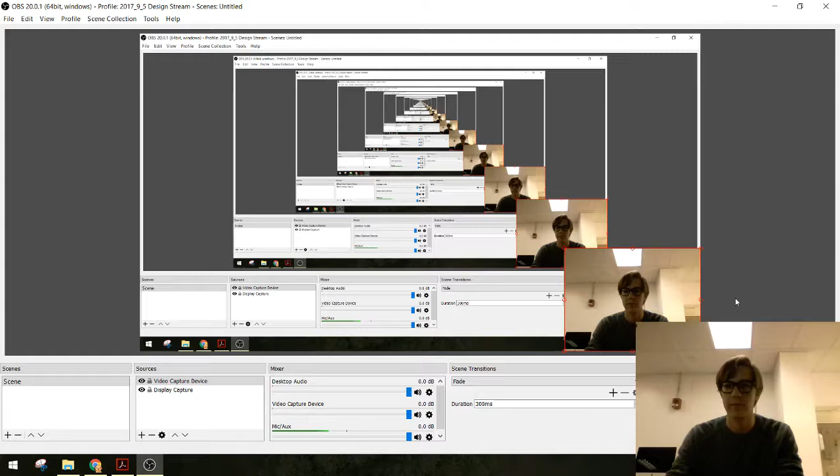I was like, oh, mind blown. So you're telling me... what is going on? Come on.

I was actually really intrigued by your information on Thingiverse. I was like, where did you learn that? You made up all of that. You made up some documentary.

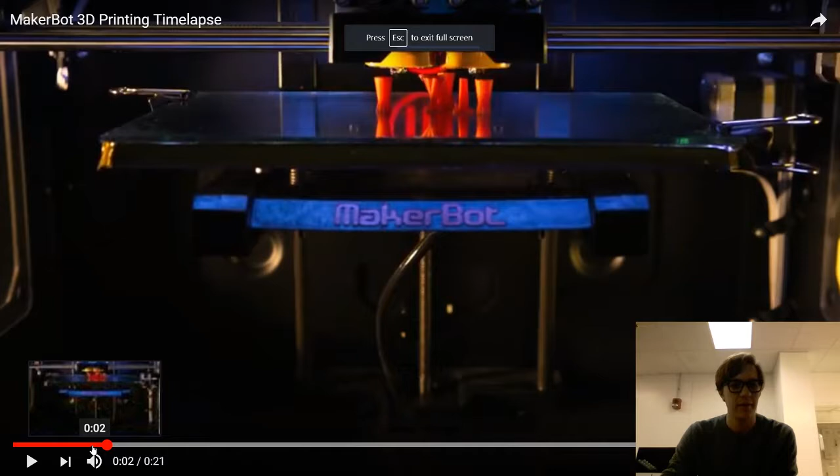All right, thank you everyone for presenting your sketch models. I think for the most part you guys hit the assignment on the head.

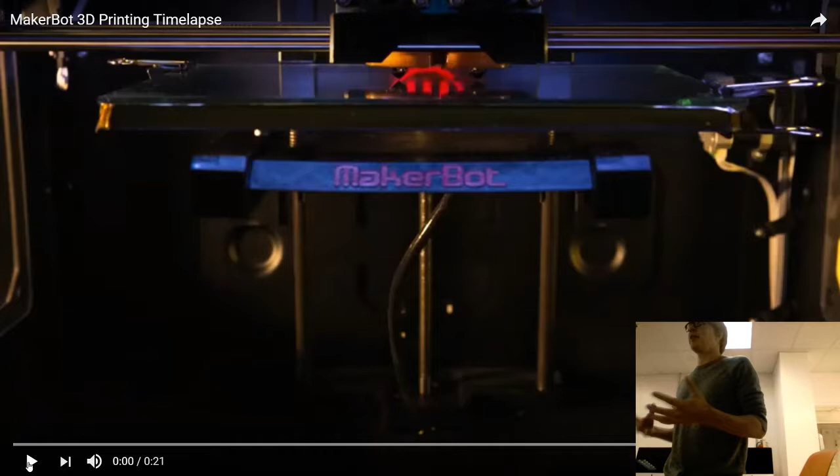These were not supposed to be beautiful, perfectly constructed things, just something to get your head back into the 3D space, thinking about real volumes in a way that's different than drawing on a 2D page.

So nice job. Hopefully you guys didn't have to spend more than half an hour or so on each of them, unless you were really into details and stuff, that's fine.

Like I said when we were talking individually, I'd encourage you to pick one of those ideas and take it the next step. In the next 45 minutes or less, hopefully, we're going to talk about some of the considerations you need to be aware of when you're refining your design in 3D for 3D printing.

I'd like to start off - I'm sure most of you have already seen a 3D printer work. There are lots of different types of 3D printers. The most common of them is an FDM printer, fused deposition modeling.

Basically, the way these work is it'll take a spool of plastic material. A lot of times it's something like a cornstarch-based plastic, like PLA, if you hear that term. It's very inexpensive, not super awful for the environment.

The print head will heat it up into a goop, kind of like hot glue, and it'll print layer by layer whatever 3D geometry you send to it. This is just one very sped-up example of a MakerBot, which is one of the printers you guys have upstairs, printing something.

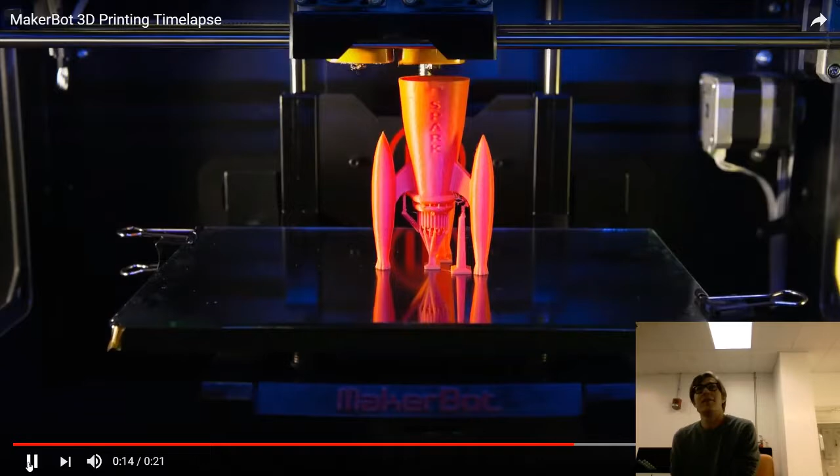Kind of a cool process. One thing you can notice is it prints from the bottom up, and orientation is going to matter.

The other thing I mentioned to you was one way you can get a preview of how an object, a 3D object that you create in Solidworks and export as an STL file, will look when it's 3D printed is by using a slicer.

So I posted on Carmen a link to download Cura, which is a 3D slicer piece of software. It will basically slice a 3D model into the pieces and code that a 3D printer needs to actually print that model.

There's a link to download it. This is the page that it brings you to. Cura is an open piece of software.

It's free. It works with a lot of different common 3D printers made by Lulzbot, Ultimaker, several other ones. This version of Cura I'm recommending you guys get comes off of the Lulzbot site - it's a specific build of Cura for Lulzbot printers, since it sounds like you also have a Lulzbot printer.

That's the printer I have, or Local Tech Heroes has. And the one that you're going to want to download is for Windows, probably, unless any of you guys are running Ubuntu or something else.

And then you got to hit this button too. There will be some options - just go through the options, download the Cura. It might ask you if you want to associate a bunch of different files with Cura. As long as you have the STL box checked, none of the other boxes need to be checked.

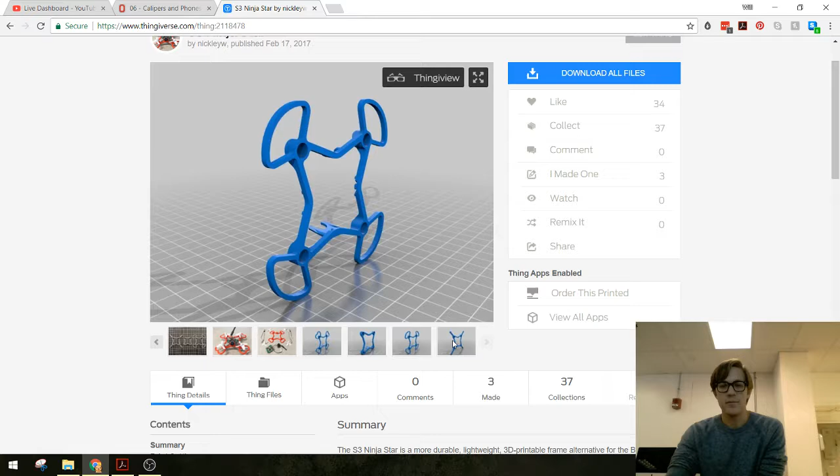It also lets other people who have made your thing show up here—178 people have downloaded this thing, and some have posted photos. Chris 4000 made one of these and posted a photo of his version of the object I designed, which is kind of cool. You guys have access to that stuff, so this is a really neat tool. Thingiverse also generates a preview of the 3D model of the file you upload, which is another cool feature on this platform.

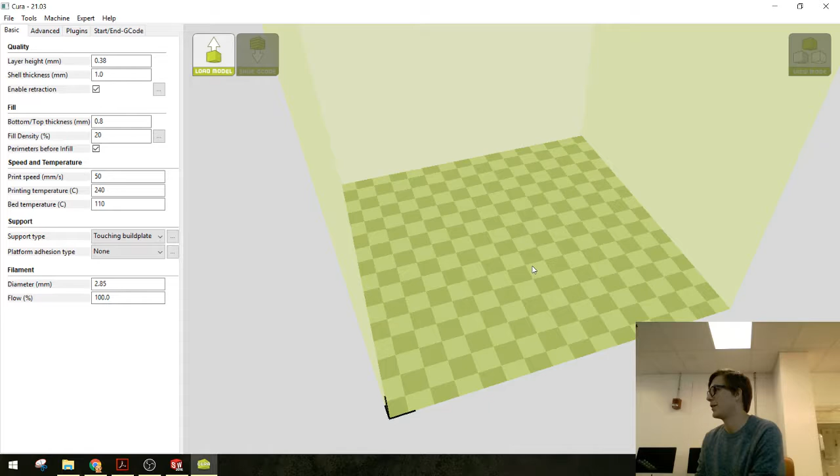This is what it looks like, the Lulzbot edition. It gives you a similar 3D space, but it has entirely different zoom, pan, and rotate controls than SolidWorks. They're also entirely different than Keyshot. Get used to that—I don't know why they can't settle on a uniform set of controls.

You can basically do a few different things here. Off to the side, these are all settings that have to do with the 3D printer and how it prints. You guys don't have to mess with any of that for what we're using this tool for right now. The big thing you want to do is load a model.

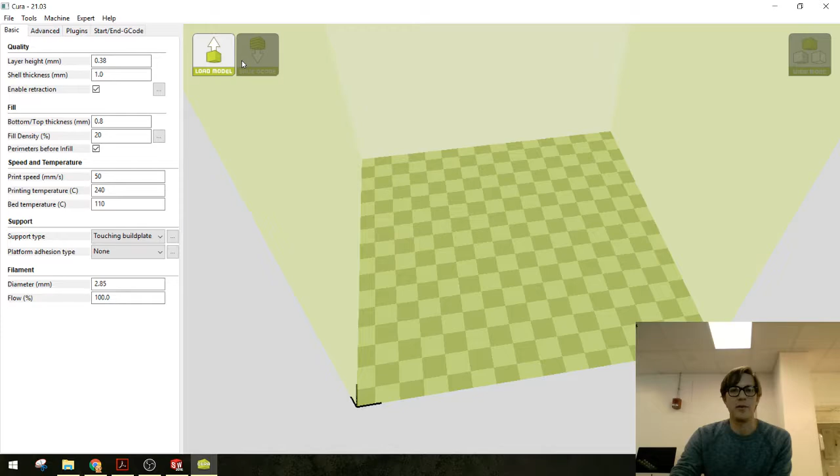I'll show you guys how to export as an STL, but once you've exported an STL version of your file, whatever it is, you can find it and open it. So I'm going to open up this guy right here, and it'll import the geometry to exactly the scale that it's supposed to be.

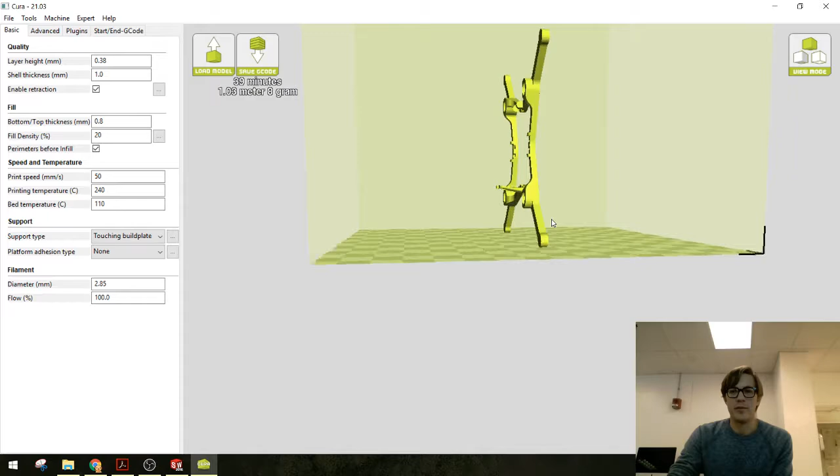So I've designed this object and added a bunch of dimensions so that it's this size. The build size of this checkered floor matches the size of the Lulzbot Mini, which I believe is about 8 inches by 8 inches. There are ways to change the machine that you're previewing on, but don't worry about that for now—just know it's something you can see when you're in a slicer software.

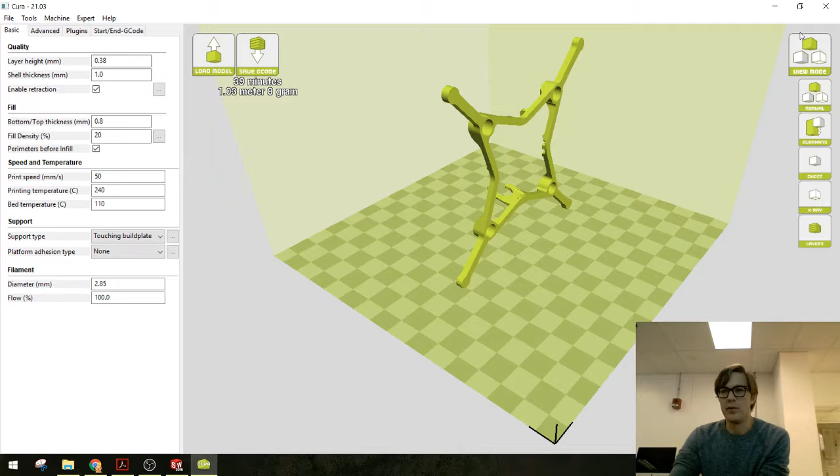What I'm interested in is different ways to look at this model. There are a couple different view modes off to the right side. One of them is layers, and if I click layers, it'll actually give me a preview of every single layer. Let's zoom in a little bit closer.

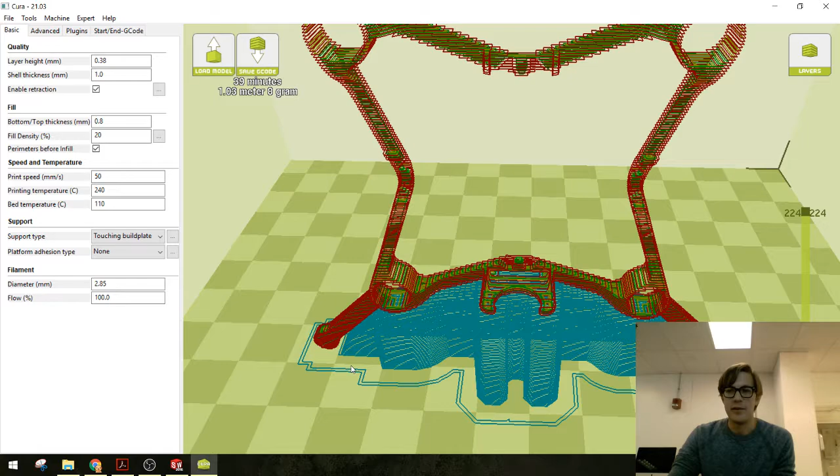Every single layer that the printer is going to have to make when it prints this part, which is kind of cool, and there are a couple different things you're seeing. Down at the bottom, I can also drag—let me zoom out a little bit here—and drag my layer progress down to see each layer by layer by layer.

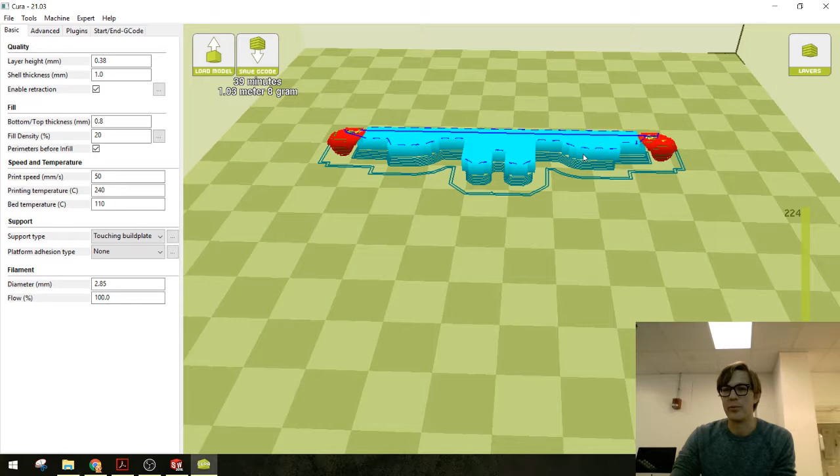So the first few layers, it's going to print a lot of this blue stuff, and by the time it gets to the top, it's not really printing blue stuff anymore. That blue stuff, these blue layers, is support material. It's the same material used to make everything else in this geometry, but it's not actually part of the model. When I brought this in, there wasn't this crazy amount of material underneath here.

It needs that in order to have a place to start printing the rest of this geometry on my quadcopter frame when the printer makes it up to that layer. In general, you guys are going to want to minimize the amount of support material required to print your models, because it sticks to your model and you have to scrape it off. It's just hard to clean up, and it adds extra time and material to your build.

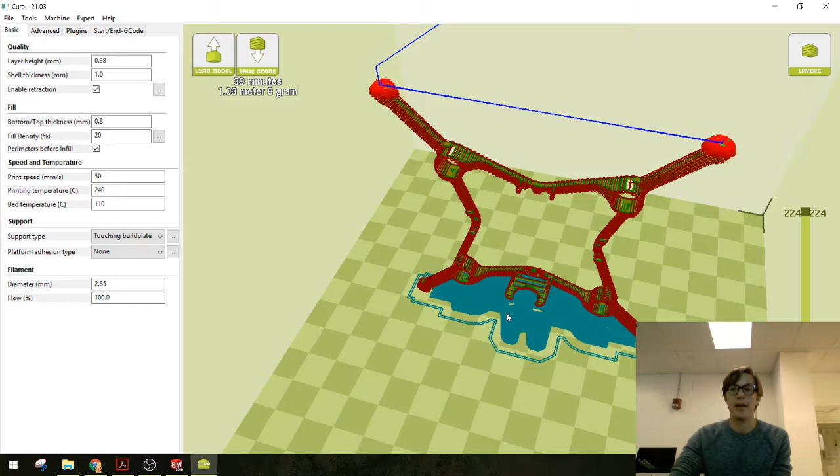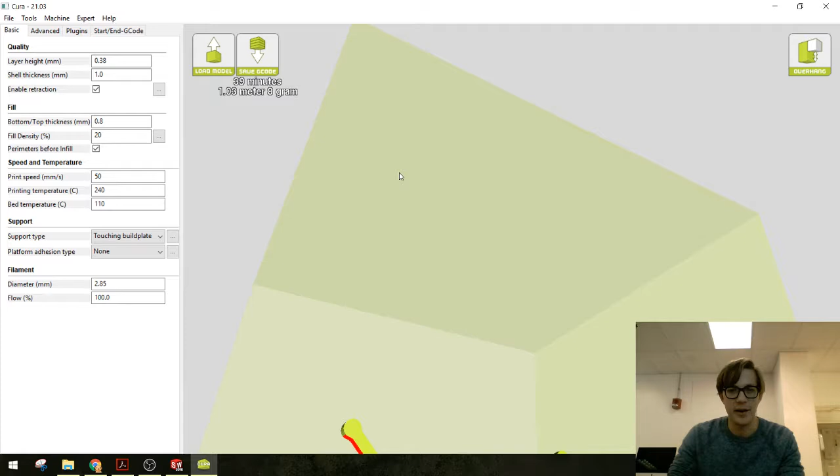It probably does need it in the middle, and that's the other kind of crazy thing here. Let's see if we show overhang. Okay, so there's another view mode here called overhang, and you can kind of see by this icon. Man, I hate zooming and stuff in here. Let's see if I can.

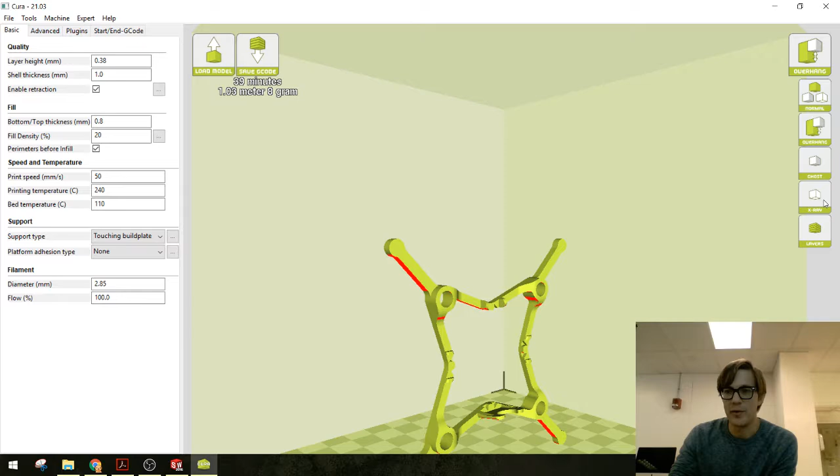All right, basically any area that is facing down is kind of an area that might need support material. As Liam just pointed out, when we looked at the layers, it added support material for the bottom of my frame here, but not for this part. It would definitely need it there, and there's a good chance that if I went to print it in this direction, it would just fail—you'd get a big nest of gross 3D printed material.

I wanted to show you this way because one of the things you can think about when designing your object, especially when you bring it into Cura, is you can change the orientation of your object to make sure it prints the way you want it to.

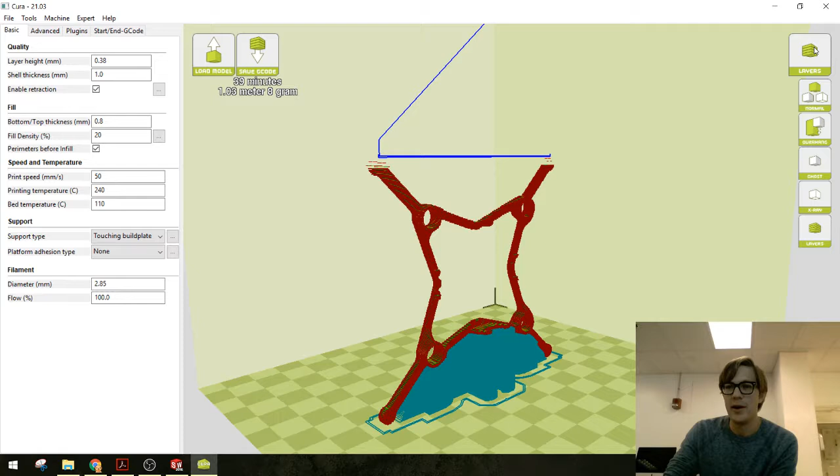To change the orientation of your model, go back to a normal view and click your model. You can drag it around, move it to a different spot on your build plate. I'm going to rotate this back around.

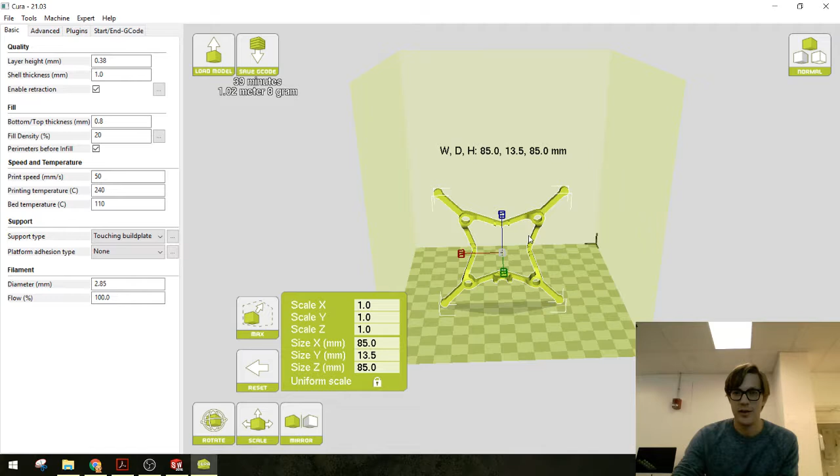You can scale it too. If you didn't care about the dimensions of your object, like if it was a vase or a cup, you just wanted to print it as big or small as you could, you can change the size of the model, drag to any size. But since these have very specific dimensions, I don't really want to do that.

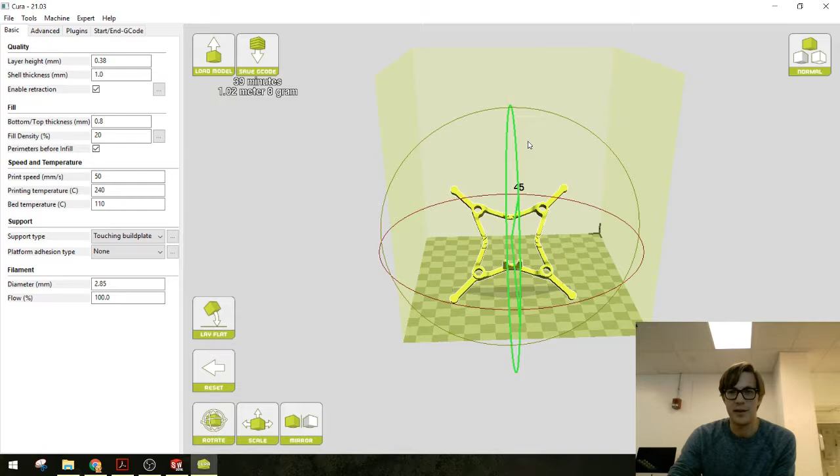You can rotate your model. This button lets you rotate, and if you click on one of these different axes, it lets you rotate along that axis. It does tend to snap, you see it go 45, 60, 75, 90, it kind of snaps to regular angles. So if I wanted to rotate this 90 degrees so it sits flat, there we go.

Now if I check my layers mode, it processes it again, and I don't see any of that blue material underneath. There is a blue outline around the edge of the model, but that's just something this version of Cura for Lulzbot does by default to show you the proximity of the build before it prints.

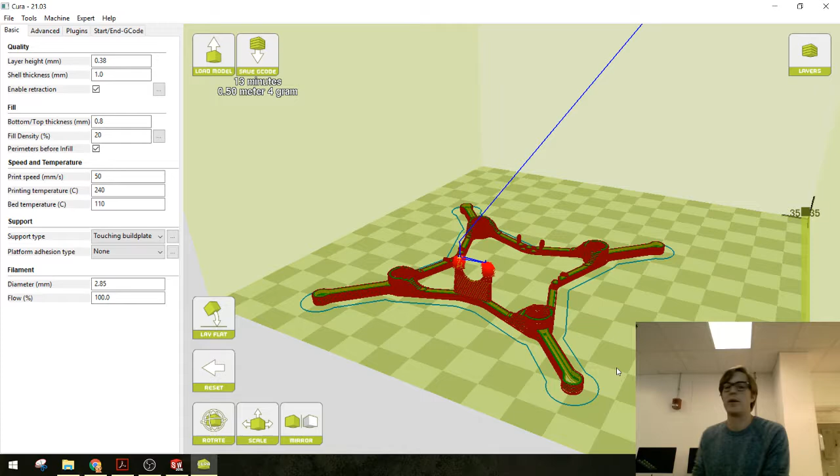But this is kind of what I want you guys to look for: find an orientation to print your object that really minimizes the amount of support material you need, or you might have to redesign something, or even slice your model in half and print it in two sections to get it to print properly.

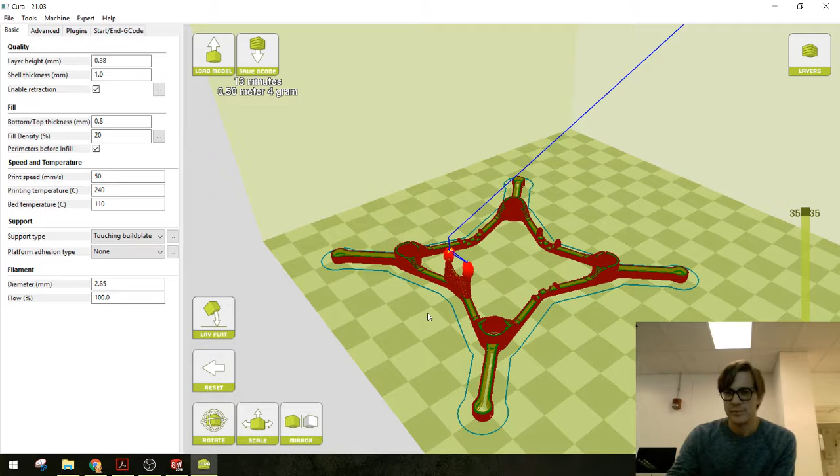You'll also see red areas in Cura. That's like edge material, it's all printed solid. If you looked at it, it would look like a relatively solid part.

Then there are these green and yellow areas. The inside of a solid part, when you 3D print it, usually isn't solid. The 3D printer is smart and will fill it with a honeycomb pattern. So let's say I printed a solid shape that looks like my water bottle, it would print the outside completely solid, and then fill the inside with a honeycomb structure, so it's not wasting material.

It's not going to print three pounds of material for just this shape, if that makes sense. All those settings, like how thick the edge material is, how thick each layer is, that's all stuff you can tweak, but that's for maybe another class. If you want to get into 3D printing, there are a lot of really cool settings you can change. I want you guys to import your models into Cura and take a look at how they might actually print.

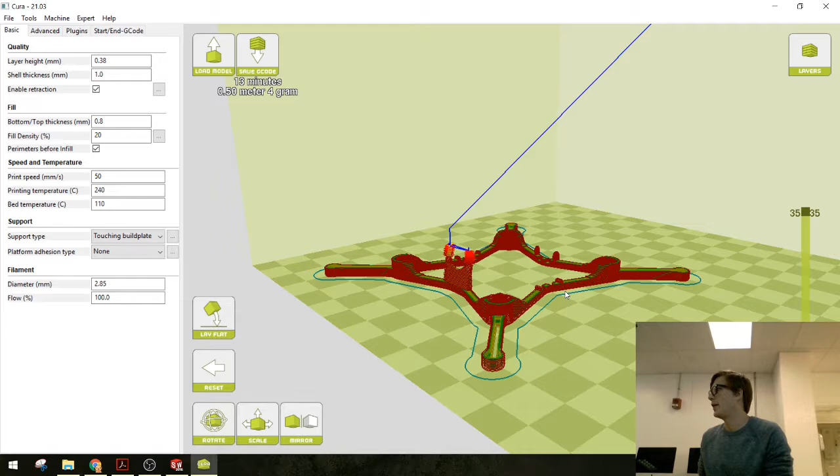In order to get your model into Cura, you need to export it as an STL. So I'm going to go through that process once really quick. Let me just open a file that I already have... I don't even know what that is. Oh, my sketch model, okay cool.

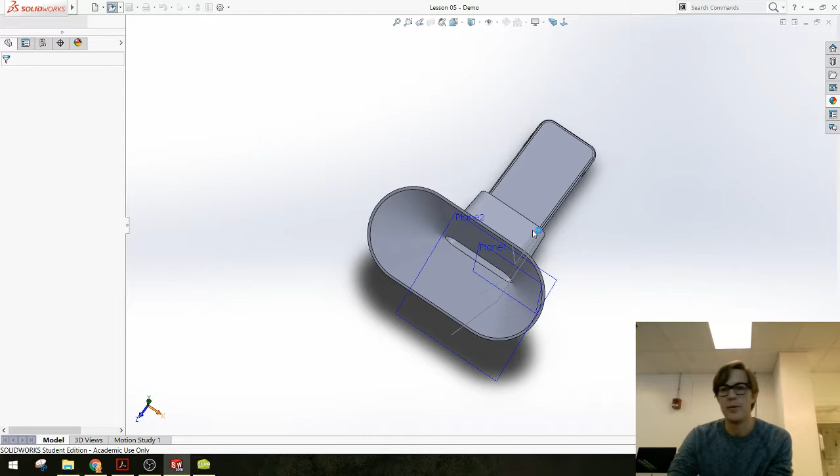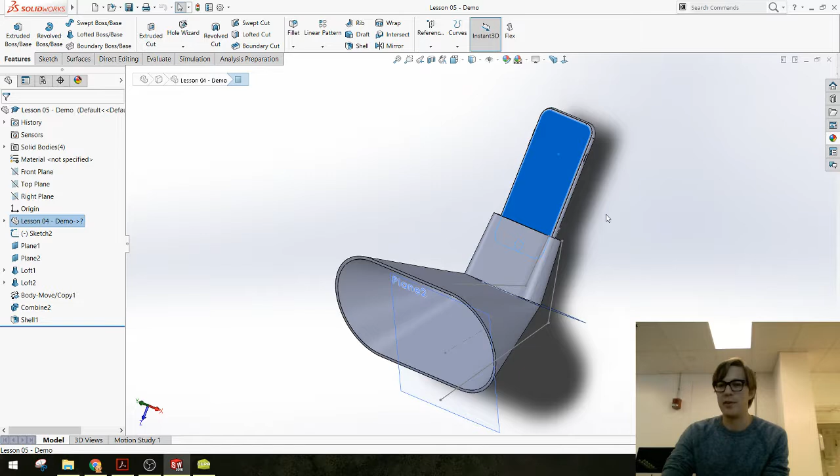Once I have my model of my phone accessory done, or halfway done, and I just want to see what it looks like in Cura, it's important that I export only the solid body I want to 3D print. You can export multiple bodies, but I don't want to see the phone in Cura. So the first thing I'm going to do is find any of those bodies I don't want, like all these phone parts, and I'm actually going to delete those bodies.

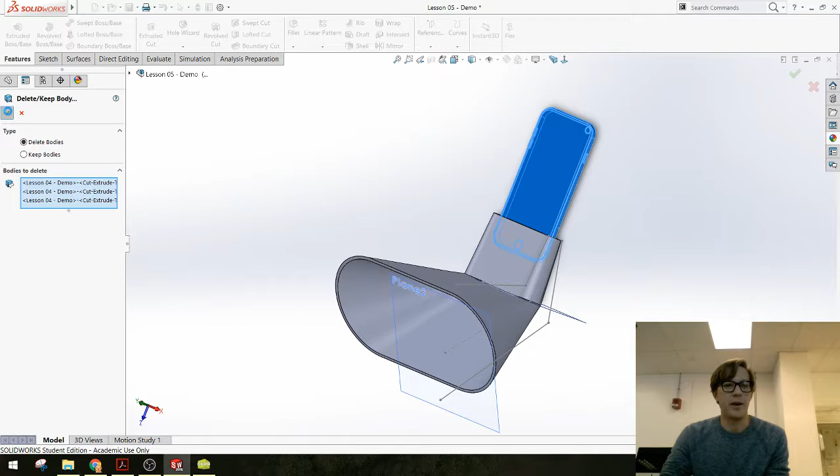I thought that was an option here, yeah, delete bodies, say okay. You can undo that later, but just for the STL export, get rid of anything you don't want to be 3D printed. Okay, so this is the part I want to see 3D printed.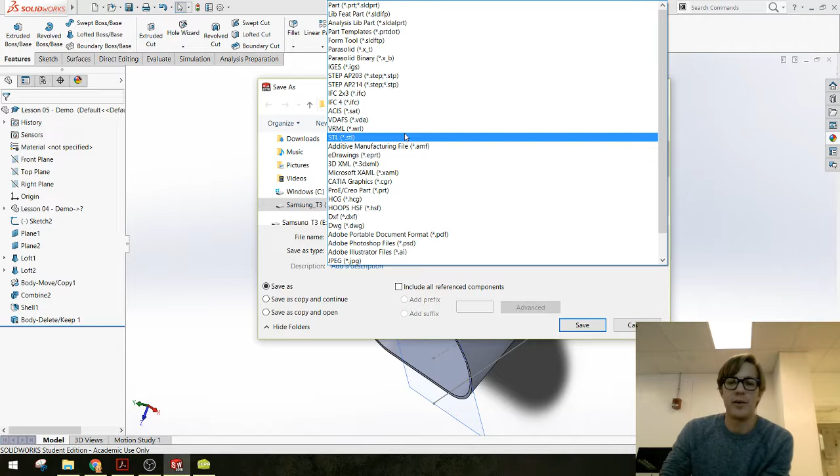I'm going to go up to File, and I wonder if we could just do it as a Save As. Yeah, so File, Save As, and STL is one of your options.

Really simple, it's just another way to save an object. There are STL options. You don't need to mess with these, but to put it on your radar if you're 3D printing something really, really small: an STL is kind of like a raster version of a 3D file.

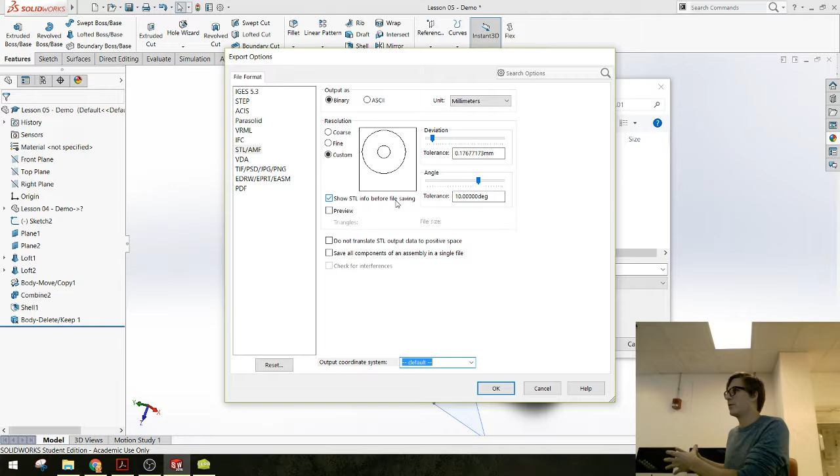What do I mean by that? If you're familiar with how Adobe Illustrator treats graphics, they're vector, math-based. You can scale them, zoom in, and they're not pixelated. Photoshop treats image files as a bunch of little pixels. Same thing happens in the 3D world. A SolidWorks file or an OBJ or some other math-based file keeps all of your build history, the math, the curves, and real geometry so that you can work with it.

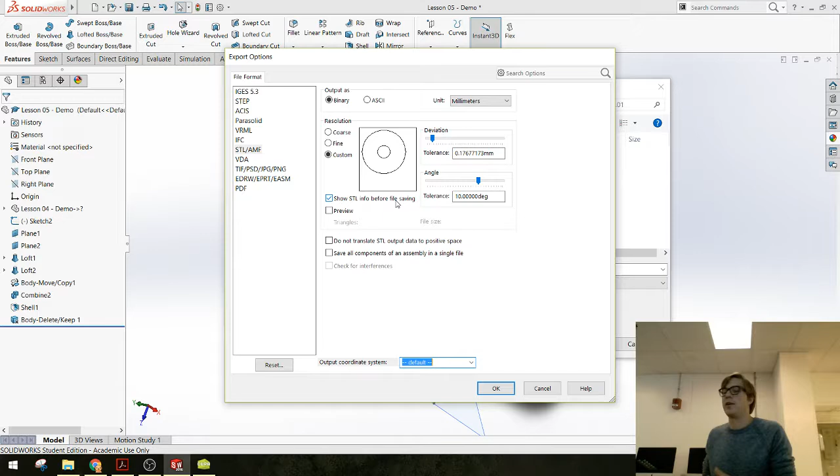STL is something called a mesh file, so there are ways to adjust the resolution of the mesh file. Not super important right now, but it does exist. So, I'm okay with those, yes, I'm going to save it as an STL. I'm just going to say save. You'll get a little preview of all these little triangles, these polygons that it turns your file into, and that's fine.

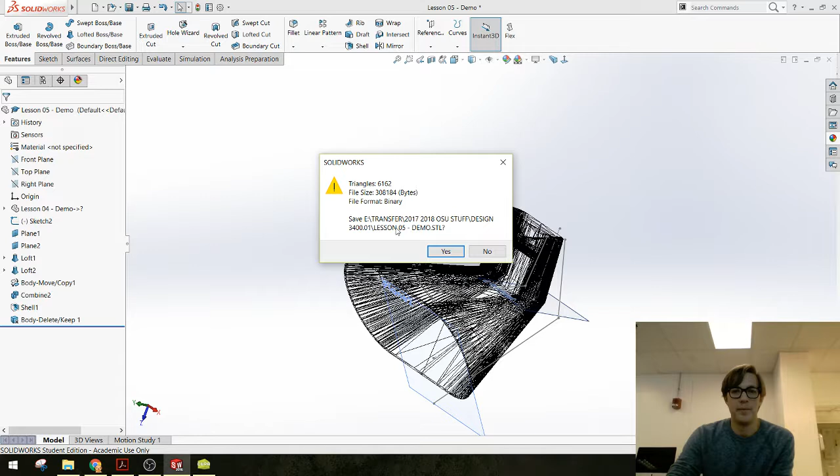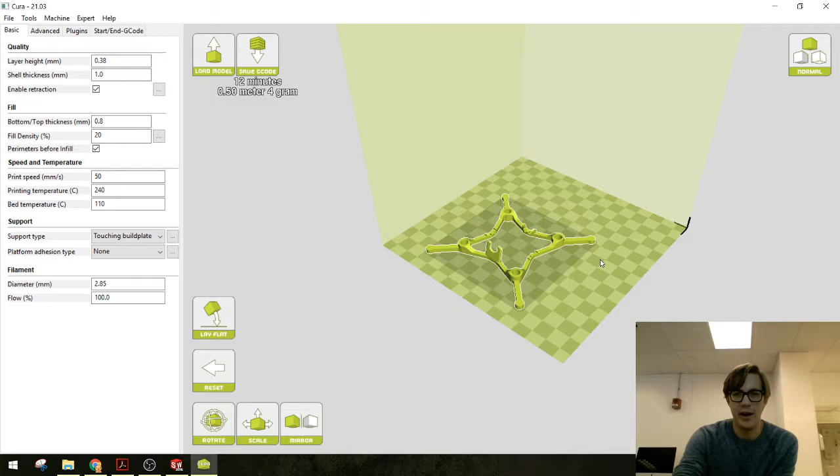Save it? Yeah, okay cool. So let's see what that looks like in Cura. I'm going to click my layers view, go back to a normal view here, and if I don't want this part anymore, I can right-click and delete the object, or just click it and hit delete. Either way works. All right, let's load another model.

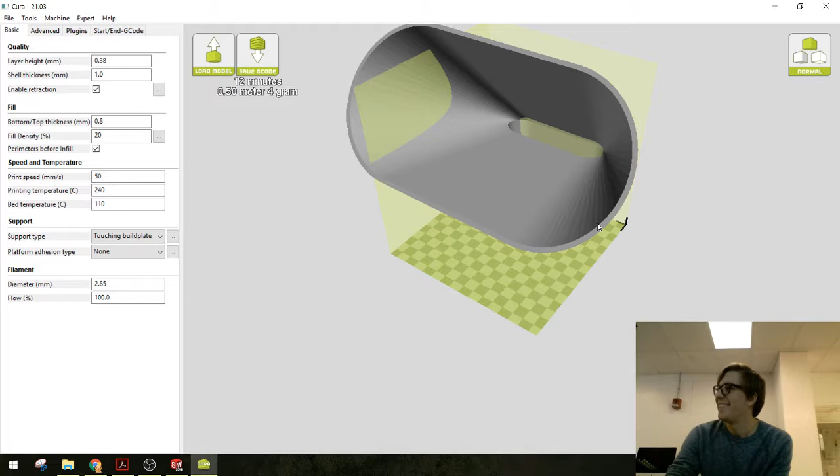I'm going to go back to OSU stuff, and there is my demo file. Wow, and it's huge. The Lulzbot Mini is only like 6x6, and I must have built this thing pretty big. Probably a good example of when I might want to scale this down, so let's go to like half scale. Okay, that's better.

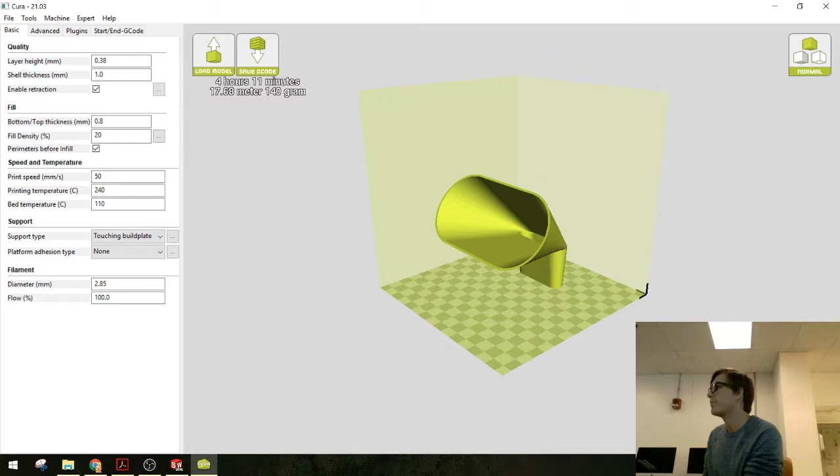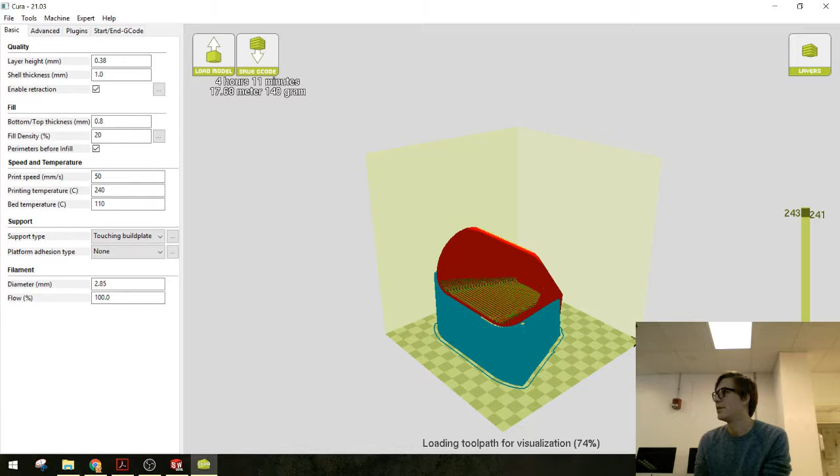Not to ask such a stupid question, but with the STL, the rasterized version, basically you're telling us to... what does that mean for us?

Okay, fair enough. So the question was, why am I telling you that an STL file is like raster as opposed to a SolidWorks file, which is like vector? Well, I guess STL is the file type that 3D printers and slicers need in order to work for some reason. It just is, and STL is useful to them that way. Unfortunately, SolidWorks doesn't really know how to edit an STL very well, and an STL doesn't carry with it any of the feature history that you get in a native SolidWorks file type. So it's just two different file types for two different reasons.

Once you save something as an STL, you can't really edit it that well anymore unless you get a mesh editor, which is a whole other thing. It's like a JPEG: you can edit a JPEG, but if you have the vector file you used to create it, you'd probably just want to edit that one and then make a new JPEG. Maybe that's a poor comparison if you're not super into the graphics world.

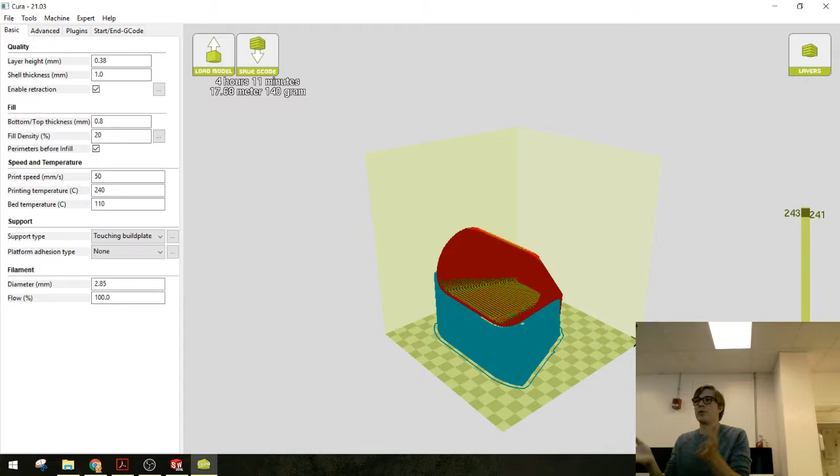Yeah, that's a good question. Do different printers print at different qualities? Newer, more expensive printers have a smaller layer size, so in an inch it might fit 1,000 layers instead of 100. That takes more time, but you get higher resolution on the part you're printing. A higher resolution STL will do better on a higher resolution printer, if that makes sense. For most stuff, on default settings, you're not going to notice any difference, so don't worry about it.

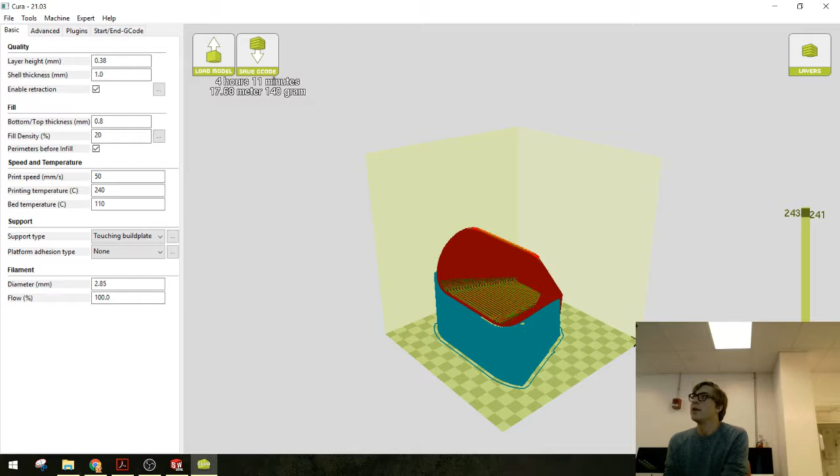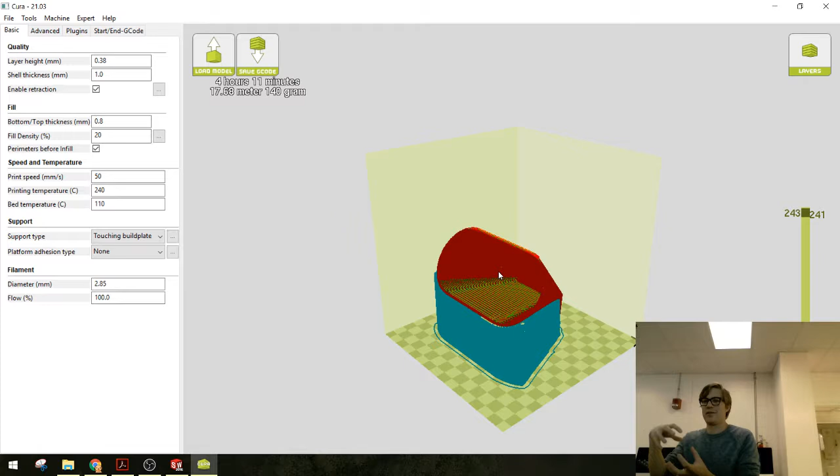The question is whether this support material has a different geometry or build process than the red solid stuff. It is different. I can bring in an example on Tuesday of a part I haven't cleaned the support material off of, so you guys can see it. It's that same honeycombed geometry, and it's loosely touching the real part. You still have to clean it off though.

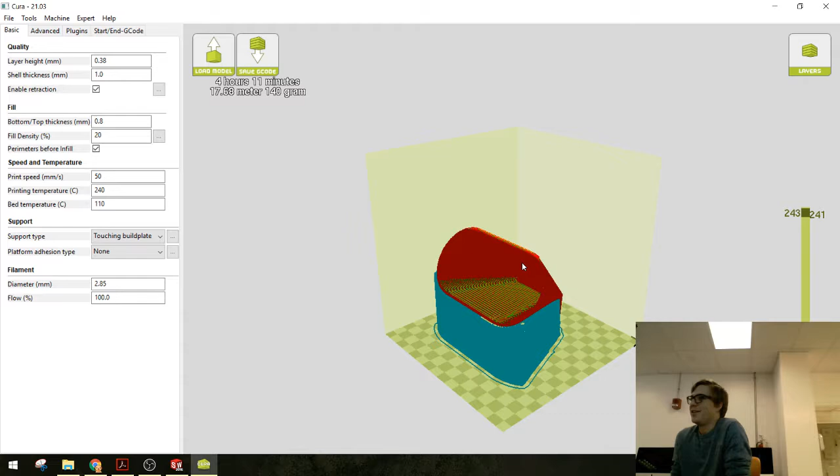I know we've got at least one resident printer enthusiast here. Don't you remelt some of this stuff already, Mitch? Not for a print, that's some exploration. HDPE, yeah, and you can make machinable stuff. So give all your support material to Mitch. That's what it's going to. Fun questions, I was like, it seems like a waste.

Yeah, you can. I believe PLA is a true thermoplastic, I have to double check that. Thermoplastics can be remelted, they're more recyclable that way. Quality does degrade over time, like every time you melt it, but yeah, you can do that.

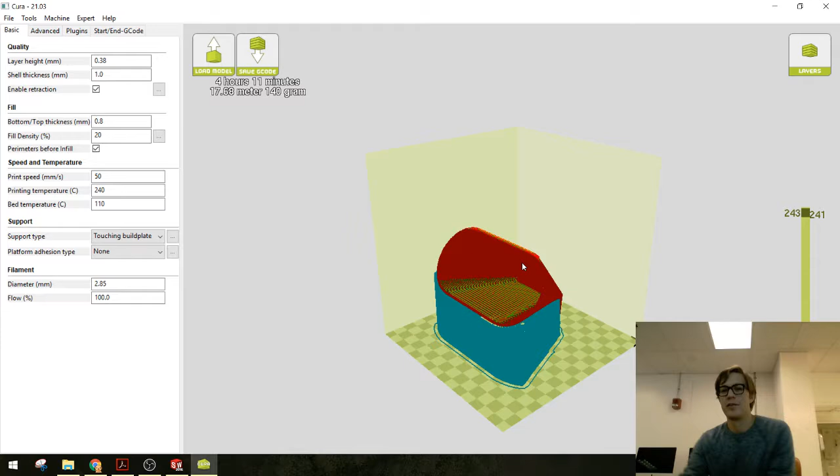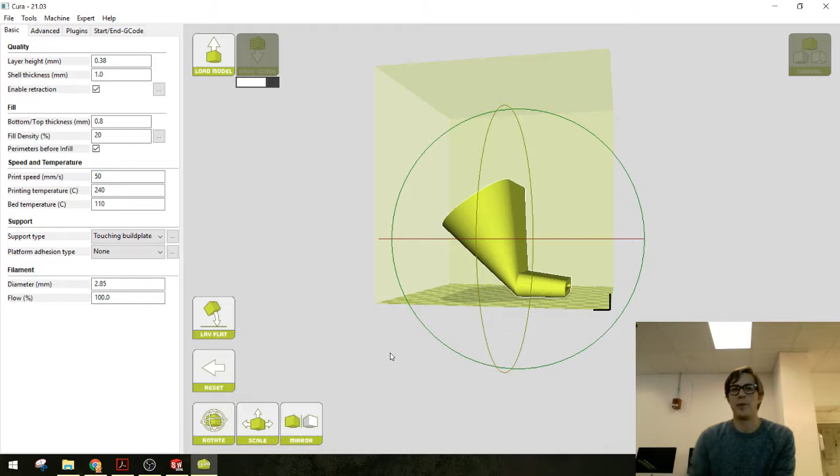So, anyway, I brought this part in. I saw that, wow, there's a lot of support material here. Let's try a different orientation, maybe rotate it so it prints this way. There is this great little button, lay flat. Cura will predict which way this thing could print the best. It's worth giving it a try. It's not super smart, but alright, let's take a look.

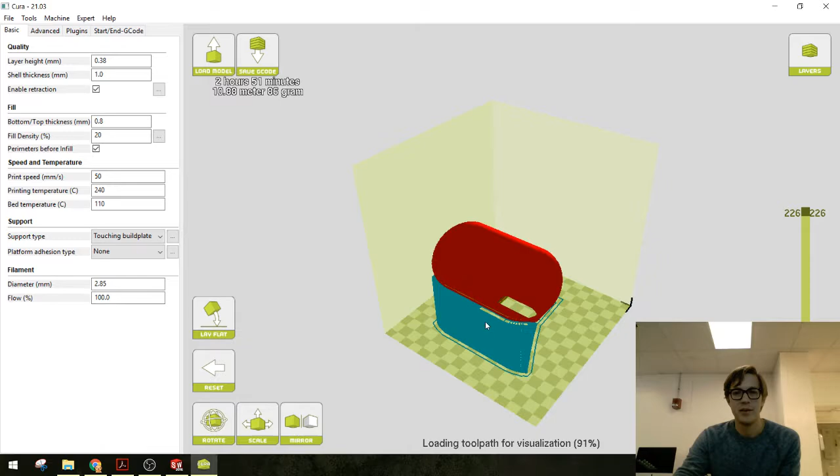Alright, so this still needs some support material, and it would probably need material inside here too. Anyway, this is a tool for you guys just to kind of see how this might print, what orientation the layers are going to show up on your model.

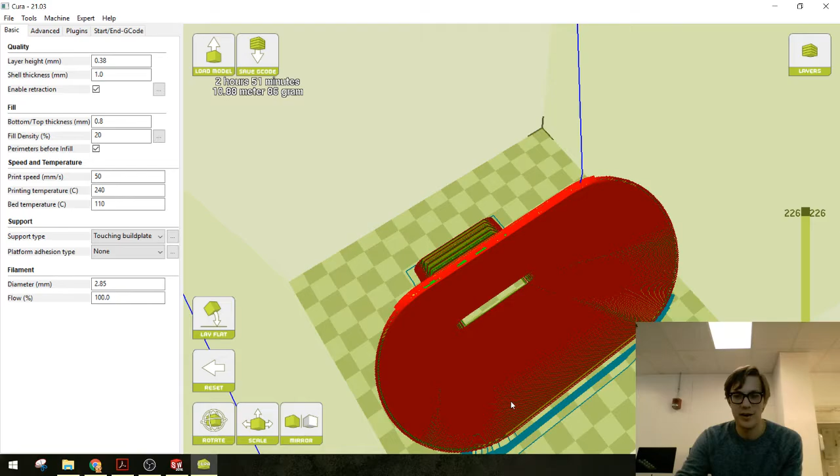You can kind of see they're oriented this way on the inside. Oh, it's actually pretty dense on the inside. I can zoom in, wow. They're oriented lengthwise. Down at the bottom of the model, they're further apart. If that bothers you, you might find another orientation or tweak your geometry to fix that.

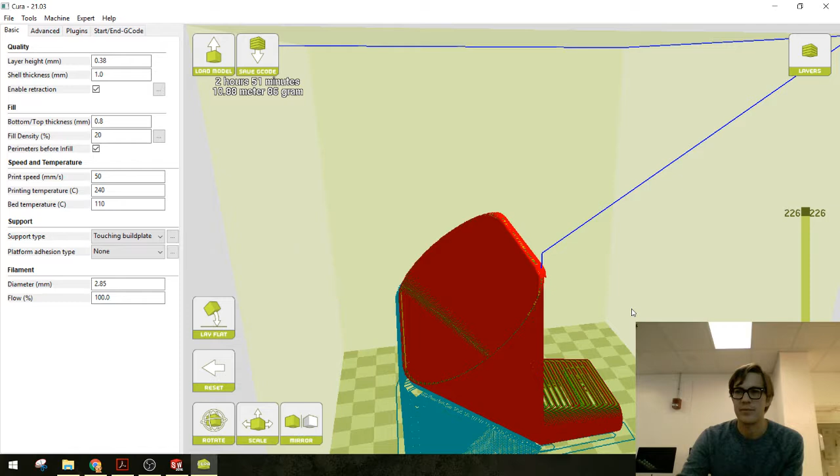Alright, any questions so far? The last thing I'll show you, if there aren't any questions, and again just to show you that it can be done, don't worry about splitting any of your models just yet, I'll show you how to cut a model in half.

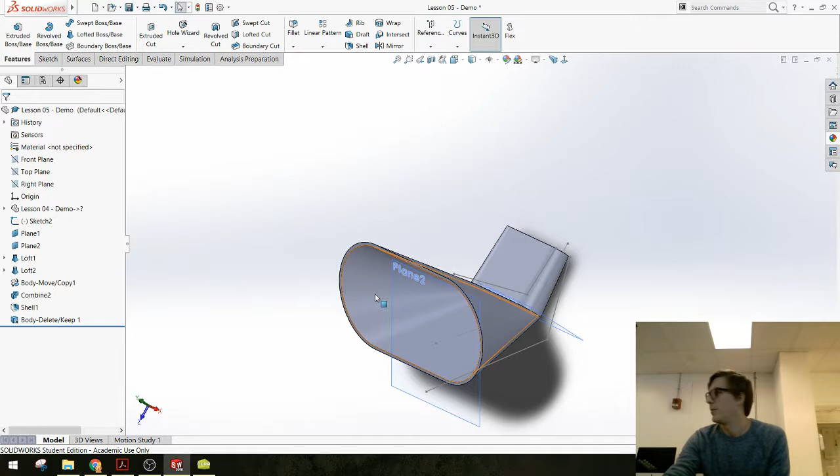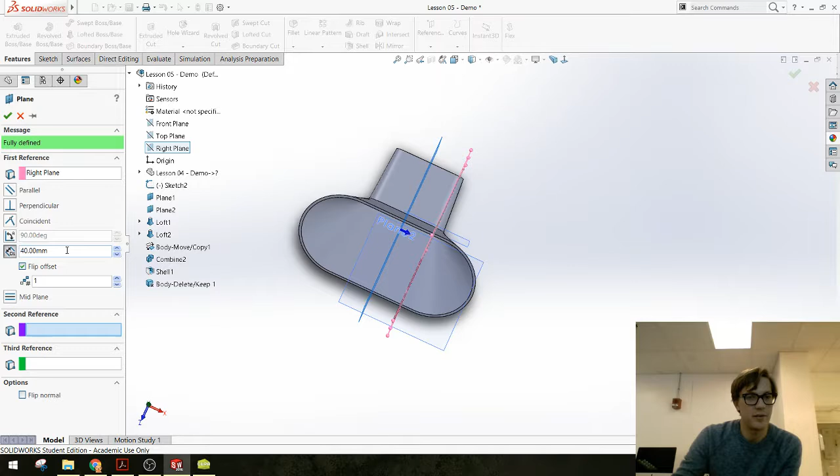So when I originally imported this thing, it was way too big. There are a couple ways I can split this, and one way is by splitting it with a plane. So I might try and set up a reference plane that's right in the middle of my object. Let's try this plane here. One way I can set up a reference plane is by picking the right plane and then dimensioning it to somewhere in the middle, and I'm just eyeballing it right now. Cool, so there's my plane.

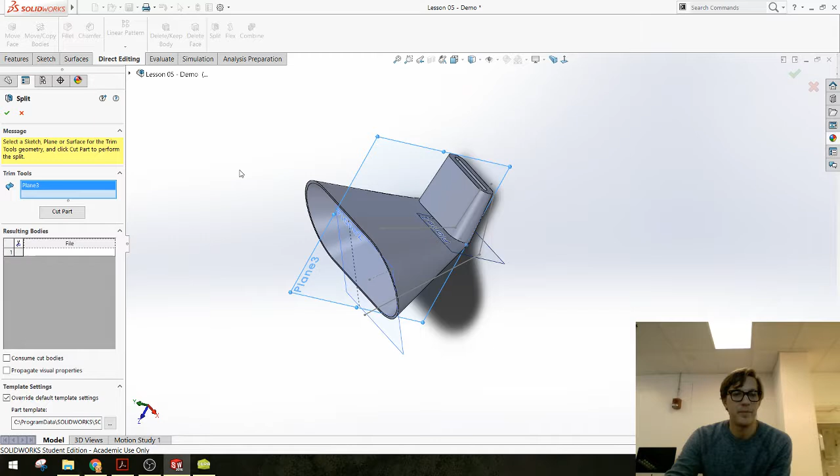There is an option under direct editing called split, and it will take any surface - it could be a plane, a surface you built, a lofted surface, a swept surface, it doesn't matter. Then you hit, after you pick your surface, cut part, and it will literally cut anything that that surface intersects with. Cool, so it looks like I've got both my halves here. Nice, okay, and you'll see now I have two separate solid bodies.

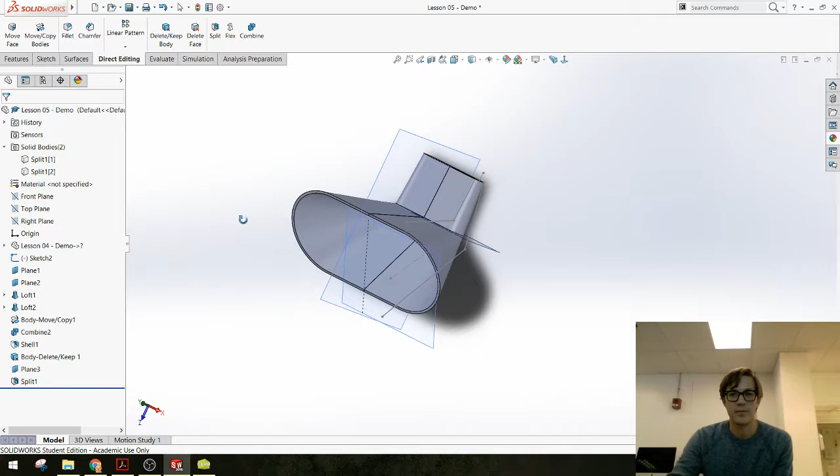If I want to export STLs of both of them, I would probably have to do the same thing where I delete one of these parts, export this, save it as an STL called part A. Then I can go back into this delete feature and say delete the other half, save it as an STL, and call it part B.

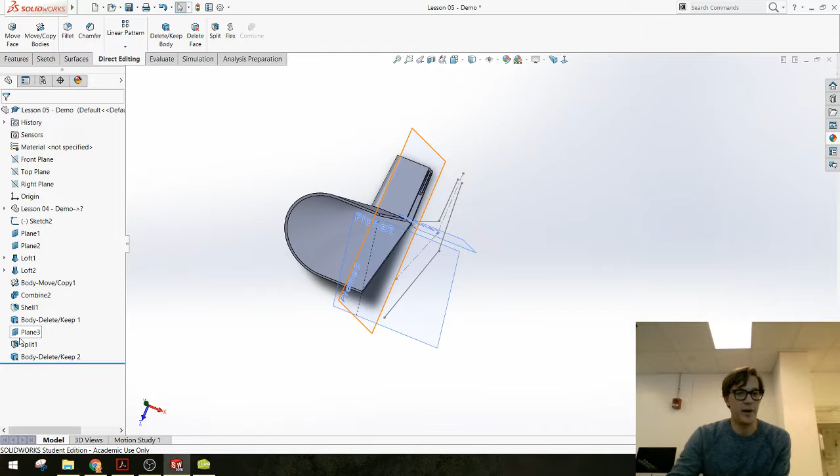If I want to go back in time, that's kind of destructive to the model, but only for the purpose of printing. I can always go back, roll these features back, and there's my model. I'll just leave this part suppressed, is what it's called.

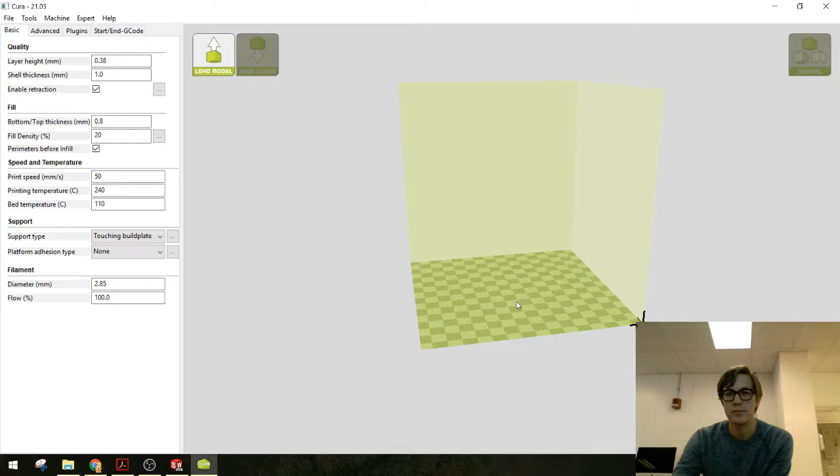All right, let's take a look at that in Cura. If you need to add support to the overhang, Lulzbot should be smart enough to build the supports. If for some reason you import it and think it really should have support, but Cura doesn't seem to be adding it, I don't know that there's a great way to add supports in Cura, but you could build support in yourself in SolidWorks or find a way to chop your model and print it in 2 parts. That's probably the best way to do it.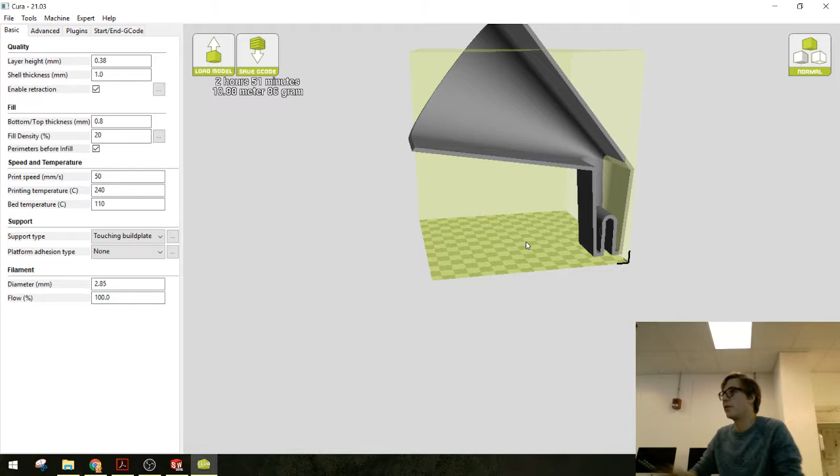For this weekend, the reason I'm trying to show you the 3D printing side of this at least a little bit is so that it's on your radar. As you're designing these parts, things that are solid and have a flatter side to print on are going to be more successful once we actually print them.

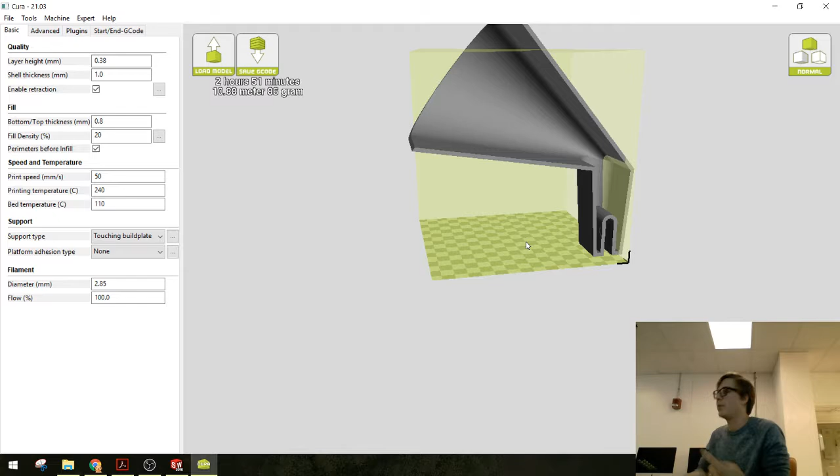For the supports, would it still have to be filed off? Is it perforated, or can you break it off and file it? I mean, you guys should have this experience, this is another good reason to do this as a 3D printing project because you've got to try it.

The support material is engineered to not be difficult to remove, but there are some really flat surfaces where if it's all supported by support material, you're going to have to do a lot of scraping to get all of it off. Sometimes you can just break it right off and it's perfectly fine. It just depends on the model.

So you guys will have a chance to see. Like I said, if I can bring something in that still has support material attached, it's like an excavation process. I spent a whole summer filing flash off of plastic.

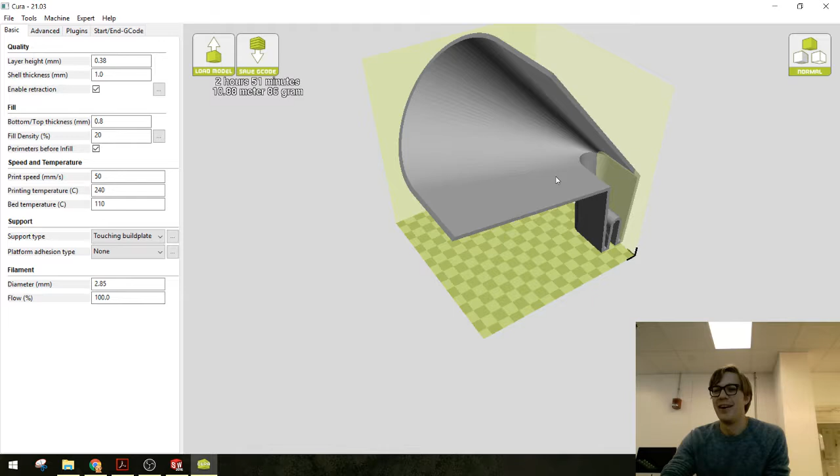Oh, that's fun. It's not, it was not fun, it was fiberglass. It was very itchy, my hands were... no, that's awful. Sorry, let me rephrase, I'm having really bad flashbacks right now. Flashbacks? Yeah, no, it's probably not that bad.

Okay, so one or maybe two other considerations to think about. The thinnest wall that a 3D printed part can have and still be relatively successful is probably about 2 millimeters. So if you're designing a wallet clip for your phone, make sure the thickness of that part isn't thinner than about 2 millimeters, otherwise it just isn't going to print correctly, or it will be too flimsy. The other thing you'll want to keep in mind, I'll give you an example I can point out here.

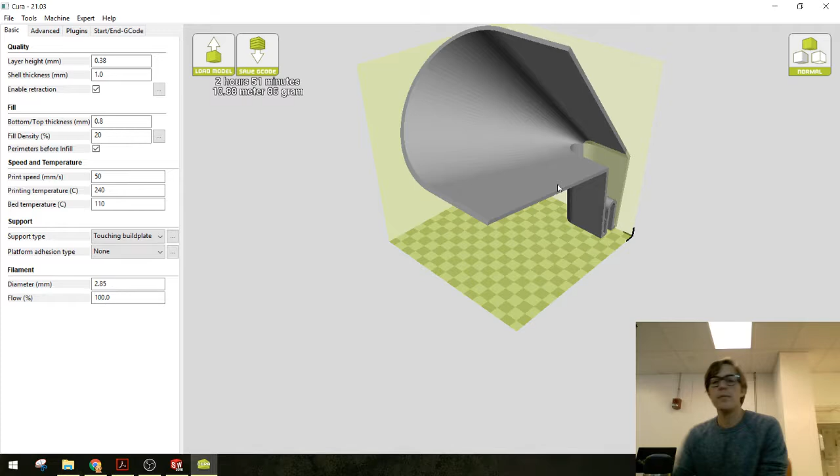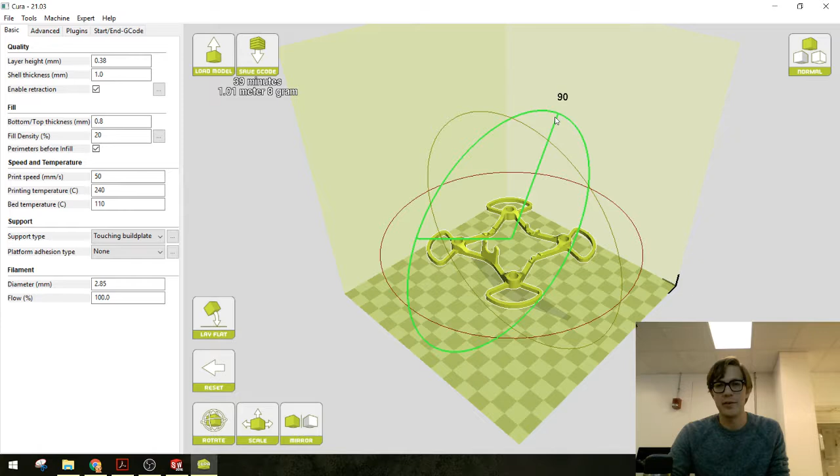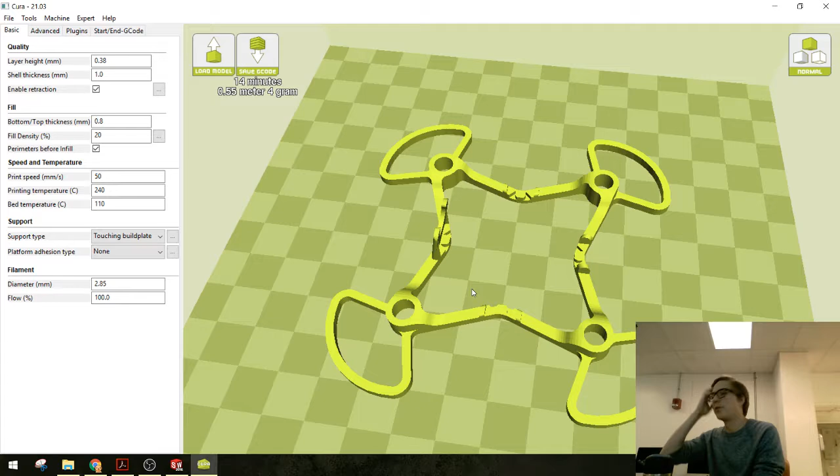Let me get rid of this thing and load my frame again. Clearance - so we haven't talked a lot about engineering a part. One of the things you'll want to keep in mind is that when the 3D printer prints geometry, it's not always super accurate. There are some tolerancing considerations you have to keep in mind. What do I mean by that? You guys probably saw in Thingiverse, these holes in this quadcopter frame are for a motor, right?

My cylindrical motor is supposed to slide into that hole and fit snugly. So far, the way you guys would have done that is take your calipers, measure the outside diameter of the motor, and set your hole size to be exactly that width, because you should be able to slide it in. In the real world, in the 3D printing world, that's not actually the case. I would give yourself about a 0.5 millimeter clearance on all sides of a part that you want to fit snug into another part. So you want to overshoot the size of the hole.

So if I measured my motor to be 5 millimeters wide, I would make that hole probably about 5.5 to 6 millimeters wide to make sure the motor actually fits inside there. So for something that would plug in, like this?

Exactly, yeah, perfect, so good question. If you have a 3D printed part that's supposed to fit into a hole in something that already exists, and that hole is, let's say, 5 millimeters, you'd probably want to make that part 4 millimeters to make it fit inside, having a 0.5 millimeter clearance all the way around. So it fits from the center of your... yeah, and then well.

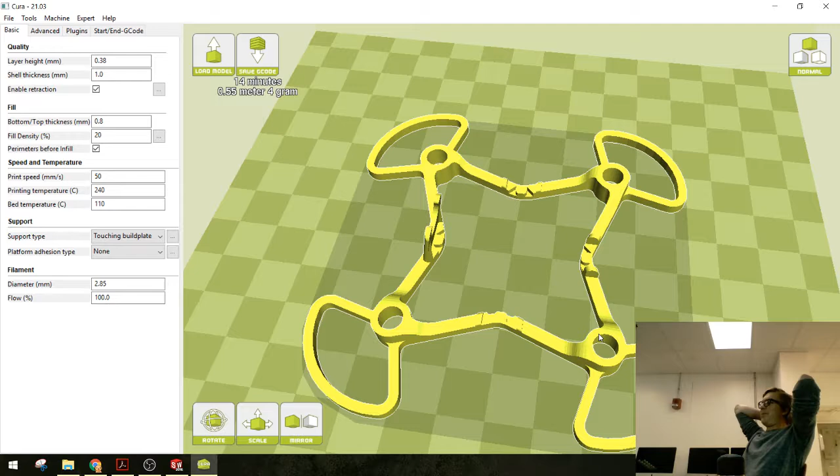Yes and no, but that's an okay way to think about it. That's something you can tweak in here as well. It does try to keep edge geometry exactly correct, but it's impossible because these printers are not super accurate.

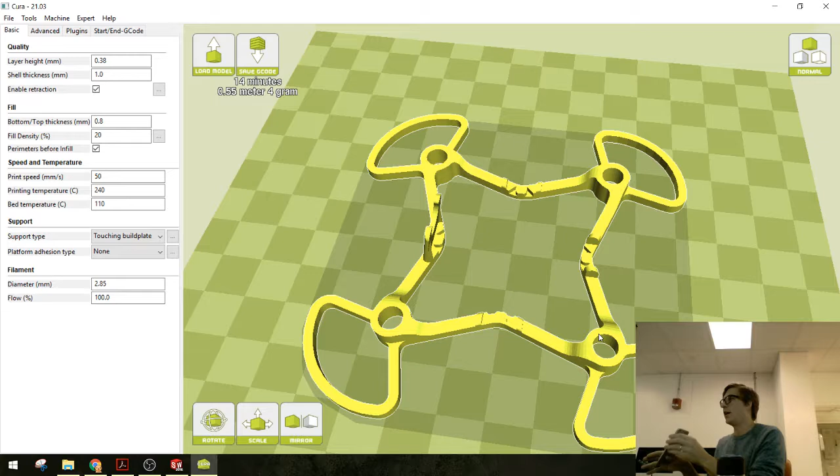For those of you making cases or slots to fit your phone, I would make the slots not exactly the width of your phone, not whatever 5 millimeters. Give yourself maybe 2 or 3 millimeters extra space so your phone can slide in and it's not jamming into the slot. That's clearance - build some clearance into those holes.

Again, it sort of depends. If you're making a case to go around the outside of your phone, you probably want that to be a pretty snug fit. So let's say I wanted a case to go around the edge of my phone, and my phone was 5 millimeters thick - I wouldn't make that hole 5 millimeters, I'd make it probably 5.5 to 6 millimeters. Every 3D printer is a little bit different.

Worst case scenario is if the slot is too thin, you get a file and file it out, or some sandpaper and sand it out. That's normal. Or you redesign the part and add a little more clearance, or if it's too loose, you can make the hole a little tighter.

Is that making sense to everyone? I know it's a very technical thing. Don't get stuck in the weeds with that kind of stuff, but think about it. For those of you designing something to go around a box on the wall, build that box into your model so when you build the part that's supposed to fit around it, you can make sure you're leaving yourself a little clearance so it actually fits around that box.

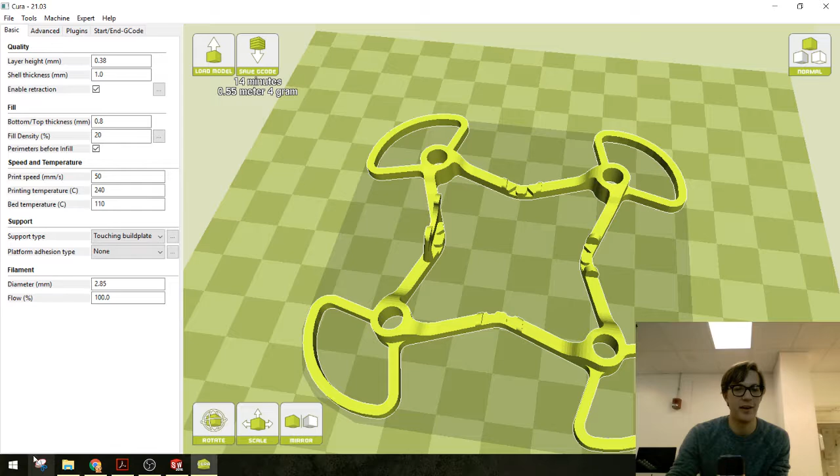So we talked about the slicer, we talked about exporting as an STL, we talked about overhang and feature size, meaning nothing thinner than about 2 millimeters - 3 millimeters or thicker is better - and we talked about clearance.

So, cool, good luck with your models. I would encourage you to do some thumbnailing, some sketching for yourself to make this design as high quality as you can. This is a big opportunity if you want to design something that can live in the real world.

Hopefully most of you guys will get a chance to print this. I want you all to print this and make a Thingiverse thing and post it, and we'll try to get some people to print this stuff. I've been talking to Idea Foundry about some bigger projects to involve you guys in with a couple other cool tools, so we'll see how this goes.